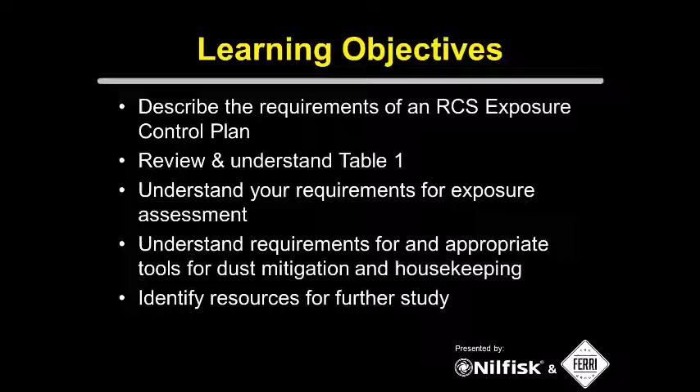Next slide. All right, so just in case you haven't refreshed yourself or you have not found information on the standard, I'll go through just a quick background on it.

If you still want to read some more about the rule, you could read the entire rule and its preamble, which actually includes a lot of really good information, especially in the preamble. So I do encourage that if you are the competent person or qualified person at your company to work on this written exposure control plan, read that preamble. Maybe not the full 600+ pages, but you can find it at the link, and the presentation will be available to you for download after the session. So I encourage you to navigate to these links. Also, the regulatory text is about 26 pages, and that is on OSHA's website.

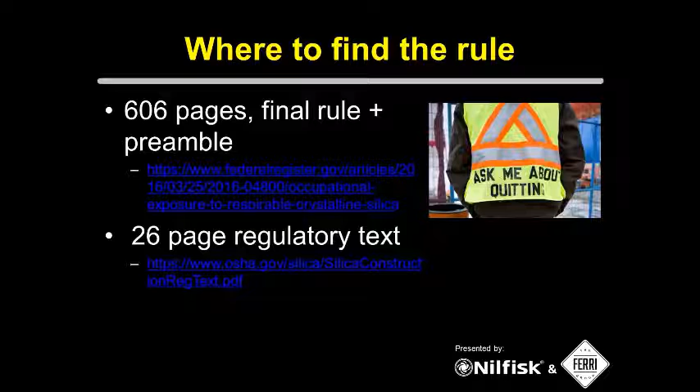Exposure levels that are new with the new standard are expressed as an 8-hour time-weighted average. So the new permissible exposure level for respirable crystalline silica is 50 micrograms per cubic meter, and the action level is 25 micrograms per cubic meter. If you were to read OSHA's preamble, they go into discussion about how even at these exposure levels, that exposure is still significant, but they felt that it is the lowest level feasible with the different types of controls that we have available to us in industry.

Some exclusions for the standard: if your exposure as you measure it stays below 25 micrograms per cubic meter as an 8-hour time-weighted average under any foreseeable conditions, then you can be excluded from the standard. And of course, the any foreseeable conditions is highlighted because that is something that you would have to prove. If you are analyzing your sampling and finding that you think you can be excluded, make sure that you can define those working conditions.

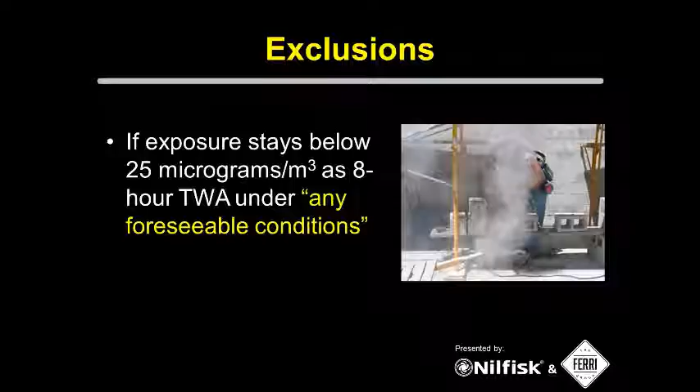Objective data is another part of the standard, where OSHA has some of their own objective data, and also there's some data out there in industry. From OSHA, if you're under 25 micrograms per cubic meter as an exception, then you don't need objective data to support this.

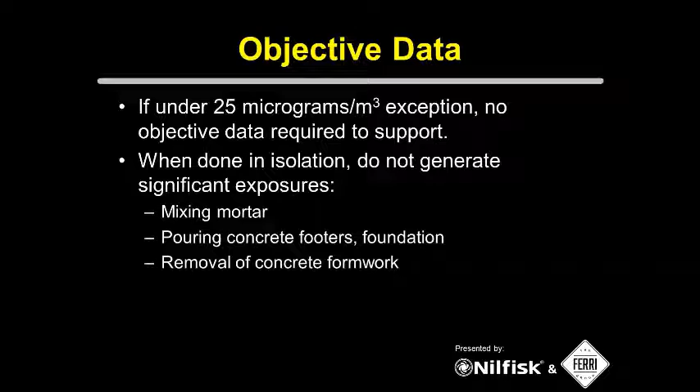OSHA found in their inspections and evaluations and analysis of sampling for silica that mixing mortar, pouring concrete footers and foundations, and removal of concrete formwork, when done in isolation, are not generating significant exposure. No exposures over 25 micrograms per cubic meter were found for those three different tasks.

Some more objective data from OSHA: they found under the action level, which is 25 micrograms per cubic meter, that when drilling holes in concrete or masonry or other tasks involving silica exposure done by non-concrete related trades like carpenters, plumbers, and electricians, with occasional brief exposures to respirable crystalline silica, these workers were found to be under the action level.

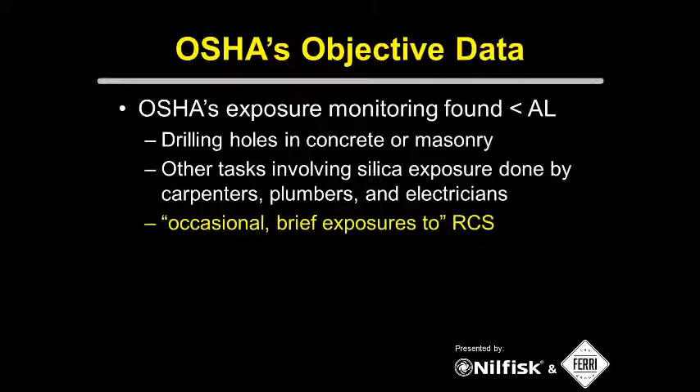There was a situation described in the preamble about dry drilling on a wall on the lower level of a concrete parking garage with poor air circulation, describing a worst case scenario. In a 15-minute exposure, the person was exposed to 300 micrograms per cubic meter, and averaged out for an 8-hour time-weighted average, their exposure was actually under the action level, found to be at 19 micrograms per cubic meter.

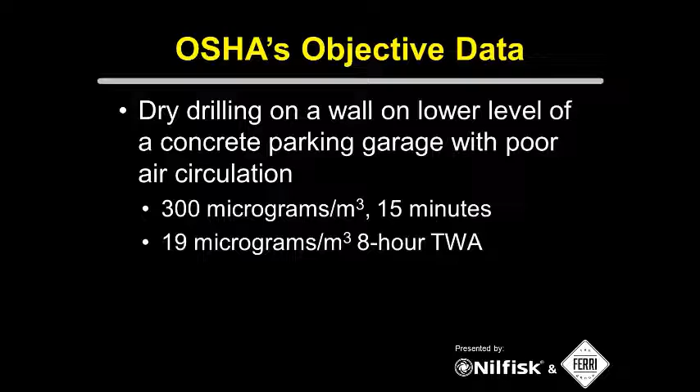So it depends on the amount of time a worker could potentially be exposed to silica-containing dust. That's why a theme throughout this webinar is going to be making sure you're sampling the work your workers are doing, so you can understand the exposure they may have depending on the tasks they do.

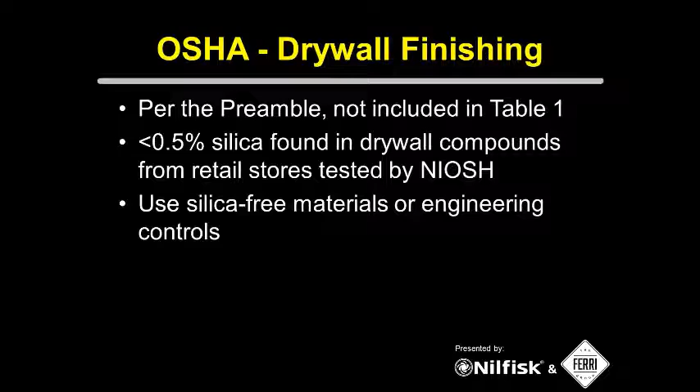Drywall finishing is not included in Table 1 of the final standard because OSHA pulled a bunch of drywall compounds from retail stores labeled silica-free, reduced silica, or other wording, and NIOSH tested those and found less than 0.5% silica in these compounds. So the general objective data and guidance from OSHA is for drywall finishing companies to use silica-free materials and/or engineering controls to minimize workers' exposure to respirable crystalline silica.

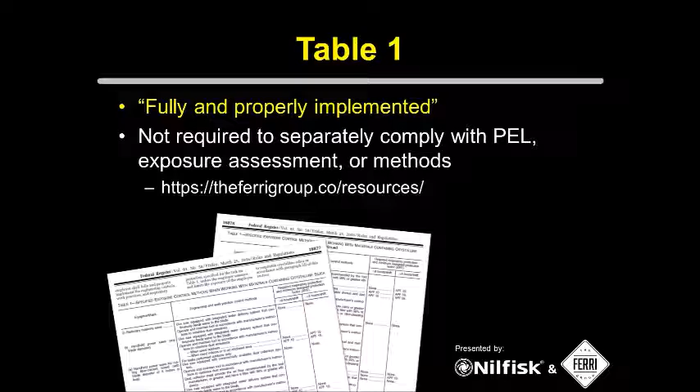All right, so Table 1 next. When you look at Table 1, make sure you read it properly—OSHA intends that you are in compliance as long as you have fully and properly implemented the controls described in Table 1. The standard as it's currently on OSHA's website is kind of difficult to download just Table 1 from, so I've got my website link where you can download an easy Word file of Table 1, and you can use that as a resource at your company in your written program. That's at theferrigroup.co/resources.

So Table 1 describes 18 different scenarios of different equipment or task activities, and they have described engineering and work practice controls as well as respiratory protection with specific assigned protection factors, APFs. That's what Table 1 is, if you haven't already taken a look at that. Table 1 includes engineering controls like water delivery systems, dust collection, and HEPA filtered vacuums, and also specifies 99% or greater efficiency or filter cleaning mechanisms, which Mark will talk about later when we discuss products for dust control.

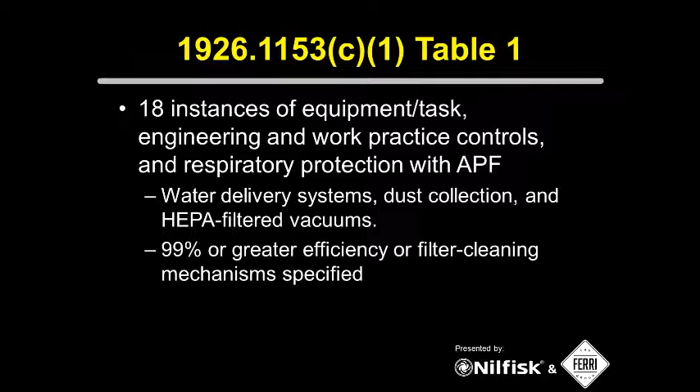So my suggested approach with Table 1 is that you should identify all the tasks at your company that could expose workers to respirable crystalline silica—just don't even look at Table 1 yet, just identify the different tasks your workers do involving concrete or potential exposure to silica dust. Then take that list and compare it to the list OSHA has developed for Table 1. You might find most of your tasks are somehow listed, and some will be left out—that's okay, that's pretty normal for construction companies doing routine work, not everything's going to be covered. So for the tasks that are on Table 1, look at what those controls are and make sure you're able to implement them.

Now, if you can't fully and properly implement the controls on Table 1, we're going to have to talk about alternative exposure control methods. So just save that for later.

I suggest using contract language if you are a general contractor, construction manager, or other kind of host employer, to take a look at your contract language to make sure that subcontractors, service providers, and vendors that you use that may create their own exposure for respirable crystalline silica, that you include in their contract that they're responsible for following the controls in Table 1.

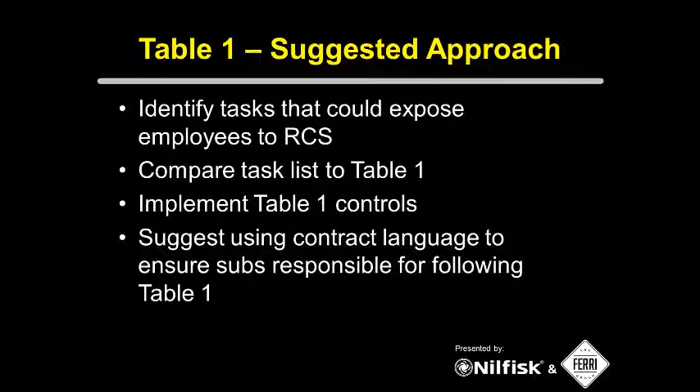So in general, for Table 1 controls, if the task is being done indoors or in an enclosed area, there needs to be some kind of exhaust ventilation to make sure that you're not accumulating visible airborne dust. I've talked to a lot of OSHA consultation personnel, and the main theme has been no dust, no dust clouds, trying to minimize these visible dust clouds as much as possible at your work sites.

So then we have work practice controls to limit entry into those areas. If there's workers who are not required for that specific task, just minimize their access to the areas where there's potential respirable crystalline silica exposure.

And then in the construction environment, when we have multiple trades that may be exposed to or creating silica-containing dust, there's an issue of area ventilation and who's responsible for that. That's another one of those suggestions I have about looking at contract language. I don't know if this has happened yet, but maybe general contractors or construction managers providing general area ventilation. That's a business decision, so that would be up to the individual contractors.

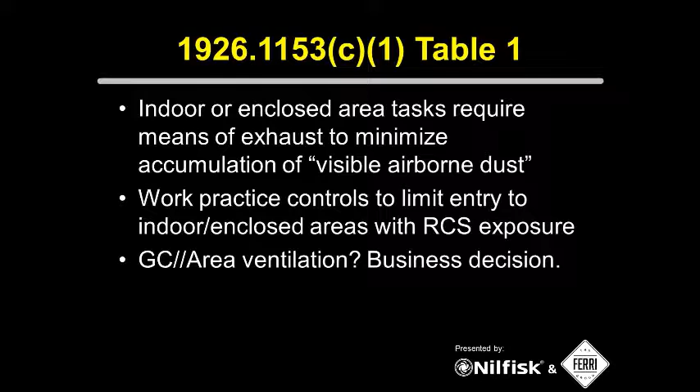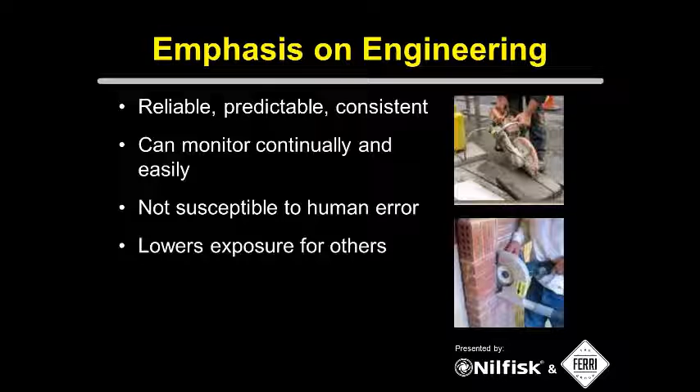So OSHA's main emphasis with Table 1 is on engineering controls. As safety professionals, we know that this is where we should be starting with controls when we identify a hazard in the first place. I don't think most of us that are safety professionals on this call really need to be reminded that engineering controls are more reliable and predictable and consistent because there's less potential for human error. It's something that we can monitor, and it also lowers exposure in the general area for other workers. So engineering controls are going to be the best thing for silica exposures on the work site.

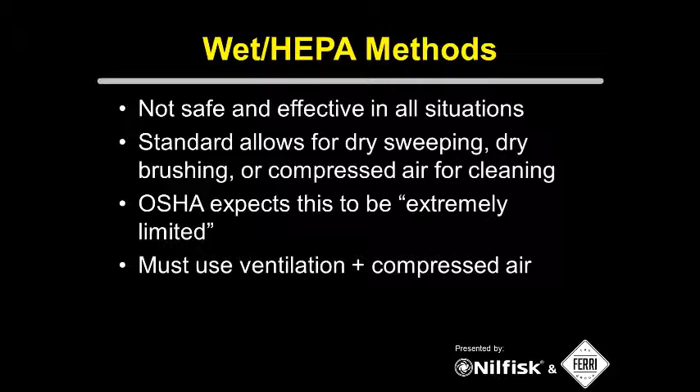So alternative exposure controls, I've alluded to that a little bit. This is a section of the standard that we're supposed to look to when the tasks that our workers do are not listed on Table 1, or if your tasks are on there but you're not able to fully and properly implement the controls that Table 1 describes. So there's an entire section of the standard for alternative exposure controls, and it can get to be a little complex, so we'll get into that here.

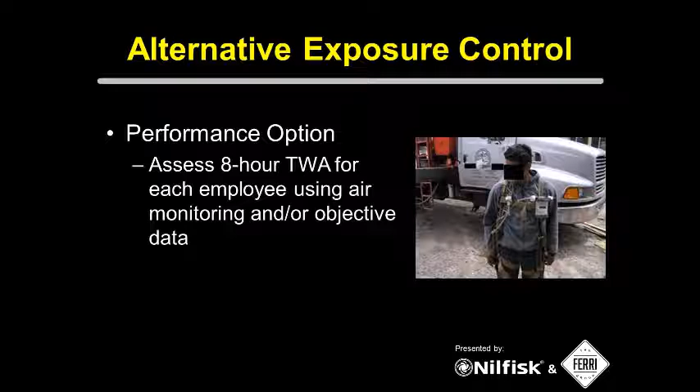So alternative exposure controls are really reliant on air sampling, finding out exactly what the exposure is to your workers on the site. The first option is what's called the performance option, and this is to assess the 8-hour time-weighted average for each employee. And when the standard says each employee, they really mean each employee. As I've talked to some consultation personnel with OSHA, they have—I don't want to say relaxed, that's the wrong word—but realizing that to be practical, it may be necessary to sample a representative group of workers. So if you are choosing that route, make sure that you're choosing the worst case scenario, using air monitoring and/or objective data that relates to those specific tasks and employees.

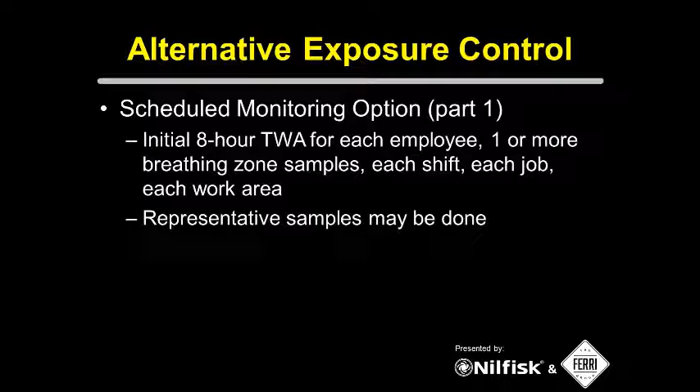Representative samples to me means go for worst case scenario in each type of task, shift, or site that may differ. As far as construction is concerned, this is not to say that you need to do air monitoring and sampling at each new job site - that's not the intent of this. You may have the same types of operations that occur at many different job sites and different jobs in the future. It's not necessary to sample at each one, but as long as you're finding representative sampling for each type of task that's done on job sites currently and that could be done in the future, that's going to satisfy the scheduled monitoring option.

Part 2 depends on what you find in the initial monitoring. If the initial samples are coming back under the action level, then you don't have to do monitoring anymore, so you can stop right there.

If the initial testing samples come back at or above that action level of 25 micrograms per cubic meter, but at or below the PEL, then you have to repeat sampling within 6 months. Now, if that initial sample is above the PEL, then you've got to repeat monitoring within 3 months, a little bit quicker. Also take into consideration in the standard, you've got to notify workers when you're conducting sampling

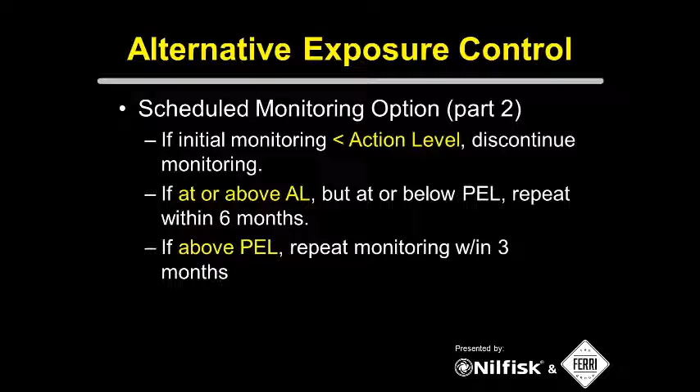and what the outcome of every sampling project ends up being. So it needs to be some kind of posting where you let the workers know what the PEL and the AL are compared to the actual samples that were taken in their work area.

So you're continuing on your scheduled monitoring, whether it's within 3 months or 6 months, and then with your next sample - whatever the most recent, not the initial sample - if it's below the action level, then you've got to repeat the sampling within 6 months until you get 2 back-to-back measurements that are 7 or more days apart under the action level.

Then you can stop monitoring unless you otherwise have to do it based on new tools, equipment, processes, or other signs of a new exposure.

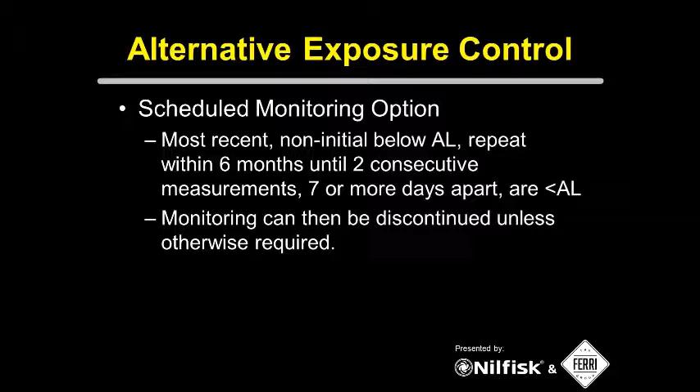And then, of course, when there's changes in production, other work practice types of changes, or maybe you take on some more concrete and silica exposure type of work, or there's a new product that you're using in your process, then conduct some more monitoring so that you can make sure that the workers are not overexposed.

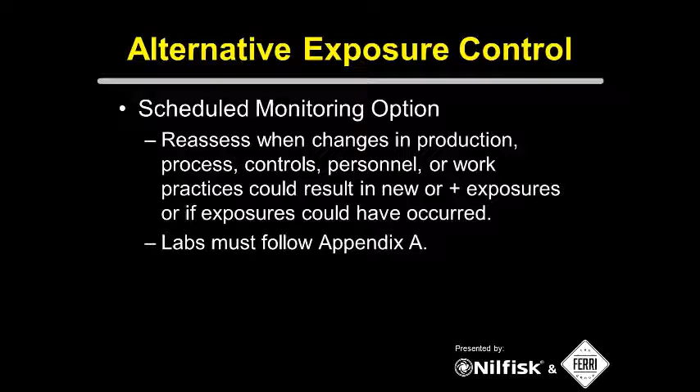Any labs that you're using for sample analysis must follow Appendix A of the new standard. That's the last remaining part of the standard that is not effective yet - it's going to be effective next June, June 23rd of 2018, when the entire standard will then be enforceable.

Employee notification of the sampling and the outcomes has to be done within 5 working days of receiving the information from the lab. It has to be in writing, and you should post it, and also include in that posting corrective actions when the sampling is over the PEL.

I've had clients that have had samples above the AL but under the PEL, and still included information about corrective actions. Another thing that people are finding as they do silica, respirable crystalline silica sampling, is that when they're also sampling for total respirable dust, they may be under the action level or PEL for silica, but over the action level or PEL for total respirable dust.

So be mindful of that, especially if you're sampling for multiple things in the dust, that information needs to be included in the notification to the workers. And as with any notification or training for your workers, make sure it's understood and clear, since some of these things use big words, or workers may not understand the sampling methodology.

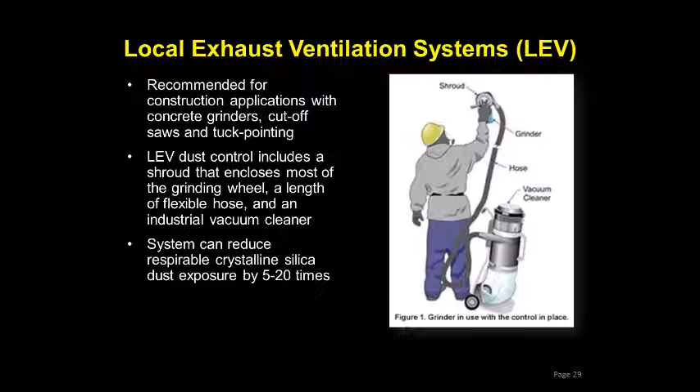Housekeeping procedures. Housekeeping isn't mentioned specifically in Table 1, but it is mentioned in the standard. It's called out specifically, as stated earlier, and prohibits the use of compressed air, dry brushing, and dry sweeping for cleaning surfaces and clothing, unless recommended methods are not feasible. So what it does do is promote the use of wet cleaning methods and/or HEPA filtered vacuuming for all housekeeping involving silica dust collection.

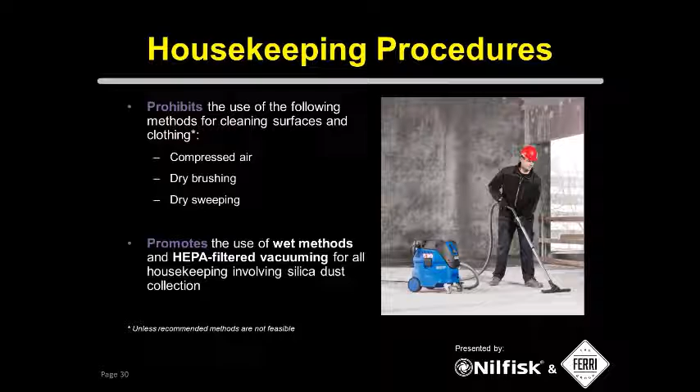Vacuum filtration requirements are called out specifically in Table 1 and other parts of the standard, and for cleanup or housekeeping, high efficiency particulate air filters, or HEPA filters, are required. According to OSHA's definition, a HEPA filter is 99.97% efficient in removing particles of 0.3 microns in diameter. True HEPA filters are individually tested and certified by a third party. In contrast, some HEPA filter manufacturers will batch test HEPA filters, so you may get one tested out of a batch of several hundred. Be sure to ask for certification for individually tested HEPA filters.

Dust collectors are filters with a capture efficiency of about 99% or greater for respirable particulate. Example filter efficiency range will be from 99% at 0.5 microns down to 99.97% at 0.3 microns.

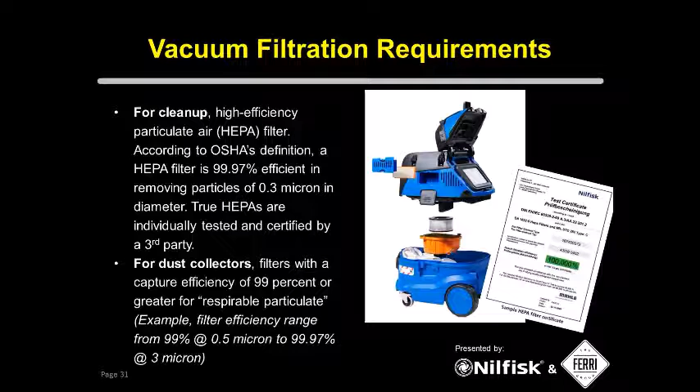Last in the filtration defense line would be the HEPA filter. So most of the particles have been filtered already through the cyclonic filtration and the main filter. The HEPA filter is going to be filtering those very small particles, down to 0.3 microns at 99.97% effective. The standard also addresses filter cleaning.

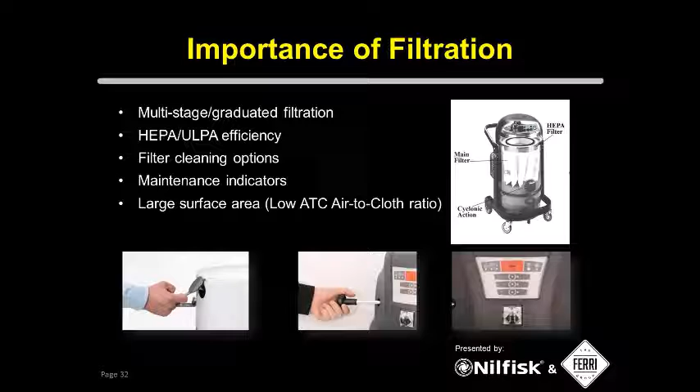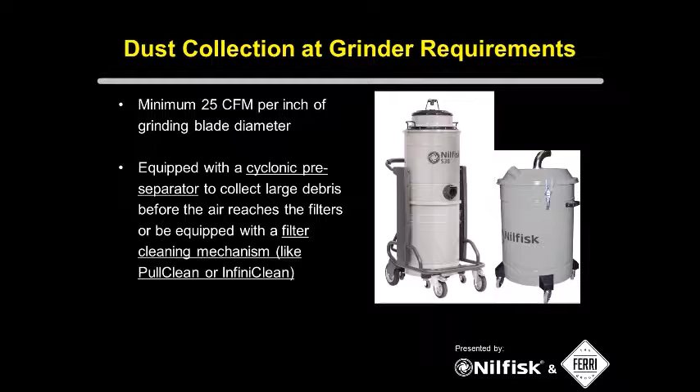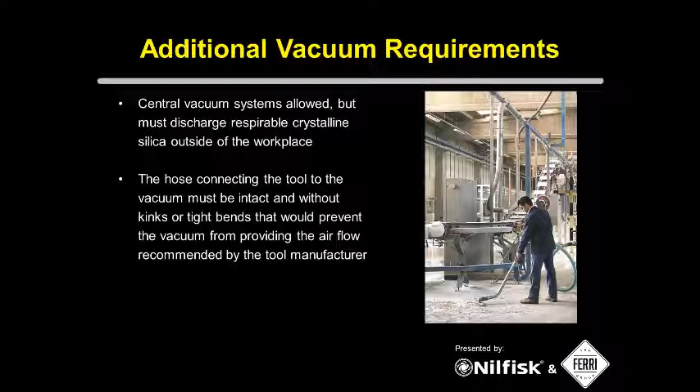Other vacuum requirements call out for central vacuum systems that are allowed, but the discharge of respirable crystalline silica must be outside of the work area. Also, the hoses connecting to the tool should be intact without any kinks or bends, because that could lower the airflow through the vacuum and wouldn't be able to suck the amount of dust that was intended to be moved. So we'll get into that as well.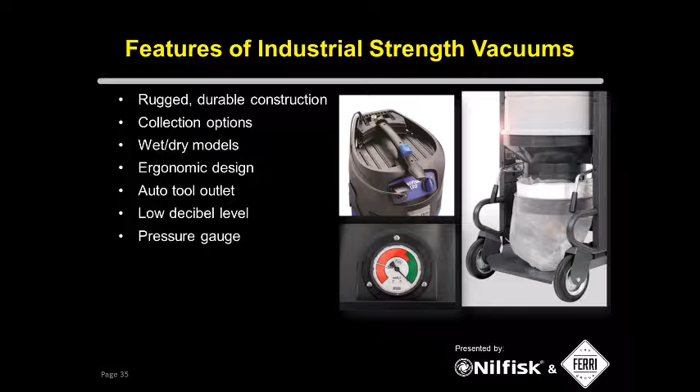Some recommended work practices when using the vacuum systems. First, keep the exhaust entry point flat against the surface, so where you're collecting the dust, having it as close to the surface and flat is most desirable. Shake the hose periodically to make sure any settled or accumulated dust at a bend is collected by the vacuum, so it's not building up there.

Working against the rotation of a cutting blade or grinding system, the tool should be flat in position so that the local exhaust ventilation system will work properly. Change the vacuum cleaner bags before they become full or before you would get a tear, let's say, so it should be checked periodically, and you want to make sure you're not overfilling it or preventing the CFM from reaching its maximum.

Having the vacuum cleaner below the work level to keep dust from falling out of the hose is a good idea, especially for any applications done on a scaffold. You want to have that vacuum below the source of cutting or source of grinding.

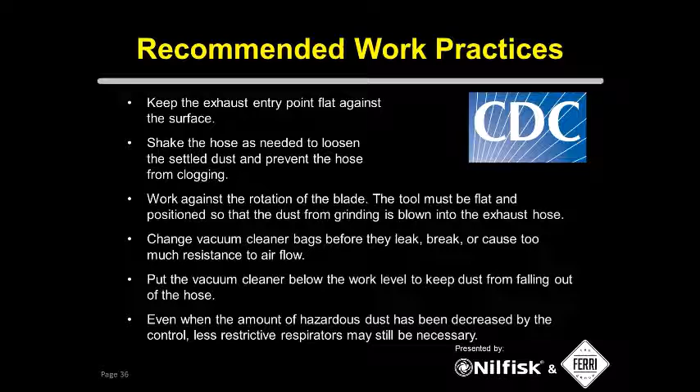And let's just say, even when all of these dust collection methods have been done, respirators may still be necessary, and that'll be called out in Table 1.

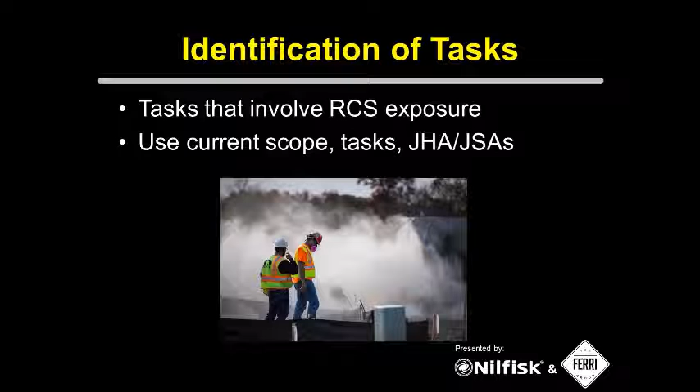Probably the largest part of everyone's written program is going to be the description of controls. For many tasks, you may just be referring to Table 1 or copy pasting parts of Table 1 into your program, and that's fine. For tasks not on Table 1, you've got to spell out what controls you're going to be using and identify situations where engineering controls may not be feasible, requiring work practice and PPE controls.

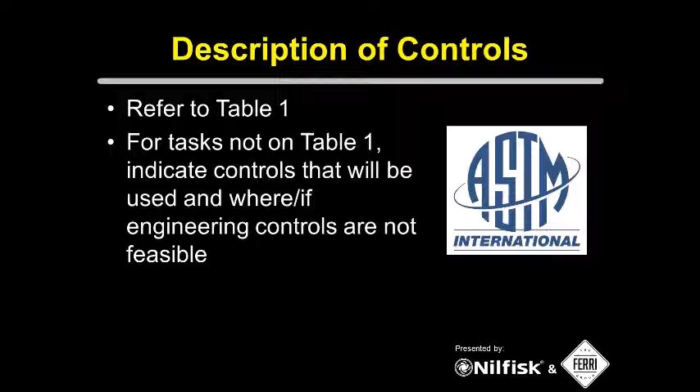Engineering and work practice controls should be used unless they're absolutely not feasible. If you're finding that engineering and work practice controls on Table 1 or alternative controls are not feasible, make sure you have some solid reasoning to back that up. If the controls you're using do not reduce worker exposure to at or below the PEL, then you've got to use respiratory protection.

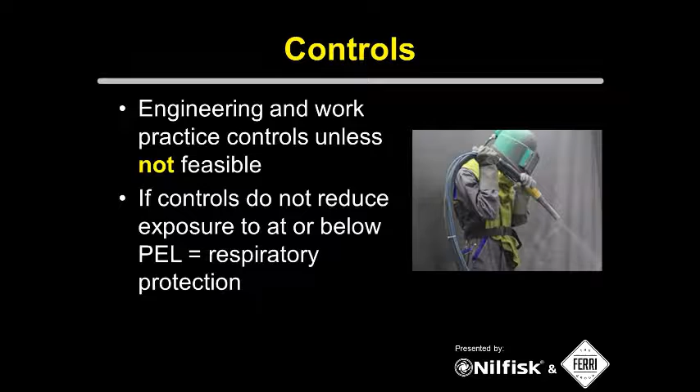Respiratory protection is in parentheses because it's not specifically called out in the Silica standard, but most of us, if we already had respiratory exposures for workers, have a respiratory protection program in place. As part of developing and implementing this respirable crystalline silica plan, make sure you revisit your respiratory protection program as well. You can use 1910.134 as your guide, and whenever Table 1 requires the use of a respirator, you've got to comply with OSHA's existing respiratory protection program.

Respiratory protection should be worn when the Table 1 controls are not fully and properly implemented. So if you're not able to completely follow what Table 1 says, respiratory protection is most likely going to be involved in the task. Also, if there's a break-in time where workers need to install or put into place the engineering and work practice controls, and they may have higher exposure to respirable crystalline silica, then respiratory protection would need to be worn at that time. Of course, whenever the PEL is exceeded, workers would need to have respiratory protection on.

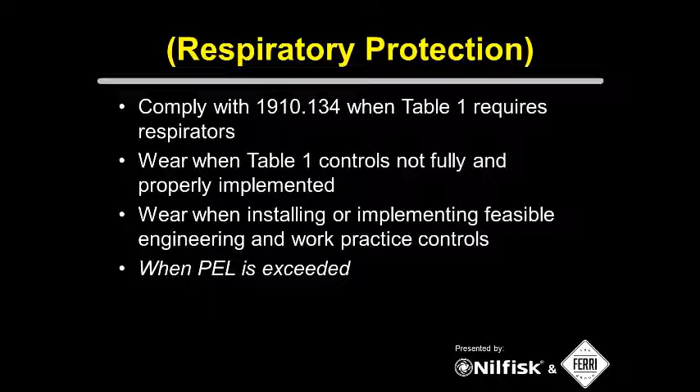The employer would be in compliance when respiratory protection is worn as prescribed in Table 1 and also following the procedures established in the Respiratory Protection Standard 1910.134. So the Silica standard brings together not only respiratory protection, but also hazard communication. Yes, there's this new Silica standard, but it also brings in some updating that you may have to do on your respiratory protection and hazard communication, which I'll get into in a minute.

Housekeeping - Mark talked a little bit about housekeeping. OSHA is talking about instances where compressed air, dry sweeping, or dry brushing would be used, and in those cases OSHA is telling you those types of controls are prohibited. Some clients I have locally have been using a sweeping compound - there are many sweeping compounds out there you could use as part of your dry sweeping, so I guess it wouldn't really be considered dry sweeping at that point if you're using a sweeping compound. But again, OSHA prohibits the use of any dry applications of housekeeping.

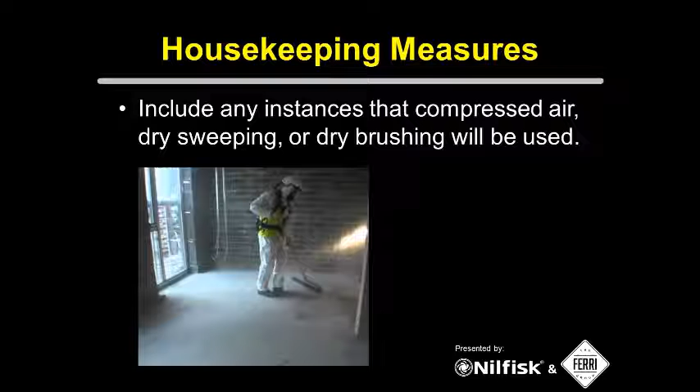Procedures to restrict access to work areas where there's potential for respirable crystalline silica are another important piece of the new standard, especially on construction sites where we've got multi-employer worksites with many different crews working next to each other, before and after each other, with potential for exposure even if your crew didn't create the hazard.

So multi-employer worksites involve the way we look at a hazard - who created it, who can correct it, who's controlling the site, and now I'm blanking on the fourth designation, I'll think of it. OSHA expects employers or competent persons of different employers to work with the general contractor to keep down respirable crystalline silica exposure for all workers on site.

If your crew is the one creating the hazard, you've got to control the respirable crystalline silica exposure down to an acceptable level. If you can't - say your workers are wearing respiratory protection - then you have to put in other controls to make sure other workers cannot come into that work area, because it's presumed they wouldn't be protected and you'd be exposing them to high levels. So you've got to limit their access to your work area.

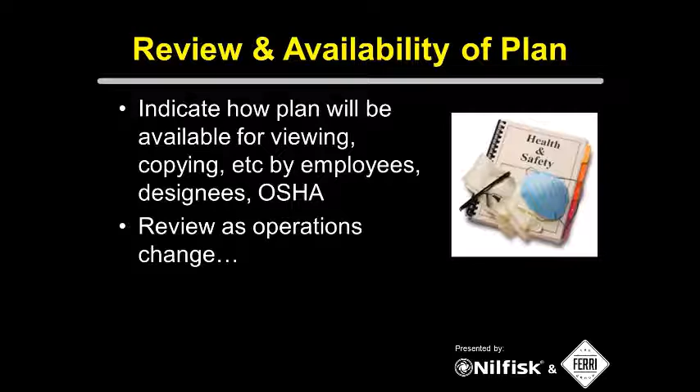Even before the standard was fully effective, general contractors were asking their subs and business partners for their written exposure control plan. Your plan, as you write it related to the OSHA standard, has to be available to workers just like any other written safety program - workers should be able to take the plan, look at it, and make copies. Union representatives, OSHA, and other authorities should be able to see that program. And like any other safety program, you're reviewing it as operations change, and at least once per year taking a look at your written program to make sure it still meets your needs.

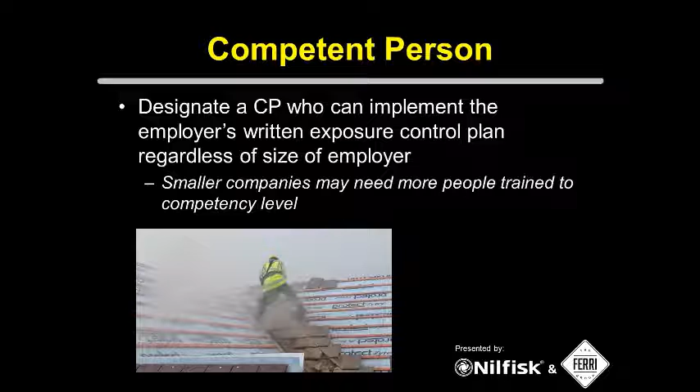There's also - I think it was the AIHA, the industrial hygiene association - that published a competent person white paper on just what it should mean to be designated a competent person for this respirable crystalline silica standard. It's very in-depth, a really good piece of information, and it might open a lot of eyes as far as who you're designating as a competent person for this topic at your work sites. That's from the AIHA. I don't have that link in this presentation, but I could find it for when Nilfisk does a follow-up with you all that have attended this webinar.

All right, so in summary, next slide.

Here's your checklist if you have not done these things yet already. So for your exposure control program, the first step is to make sure that you identify all the tasks that your workers do that have a potential for respirable crystalline silica exposure.

Then the next step is to compare those tasks to OSHA's Table 1 list, and also to update your respiratory protection program if needed based on what Table 1 is telling you should be the controls, and also to make sure that you're investing in efficient and compliant tools.

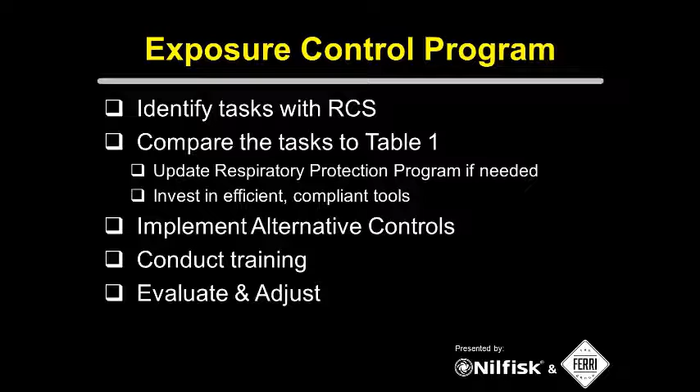And then the last step, as with any safety program, is to evaluate the progress and adjust as needed. Depending on the controls you've chosen, there may be an adjustment period to make sure people are using them properly, or you may find a wet method you're using isn't good enough for what you need on the job, so you may switch to a different engineering control. Whatever that means at your workplace, just make sure there's a method to check that these Table 1 controls or alternative exposure controls are working out, and what to do if they don't.

Here's a resource: ASTM E2625 from 2009. It's the standard practice for controlling occupational exposure to respirable crystalline silica for construction and demolition activities. I want to say it's around $25, I'm not sure, it might be more than that, but ASTM ANSI standards are available for purchase and download straight from astm.org, from that link right there.

Silica is not a new topic to OSHA - they've been focusing on it for a long time. The Special Emphasis Program began in 1996, so that's where you might recognize that graphic from. The Silica landing page or eTools landing page is at the link on the page. That's where you'll find any publication or resource OSHA has done in the past 20 plus years related to silica - lots of good information there, some of it's been there a while, some of it's a bit newer.